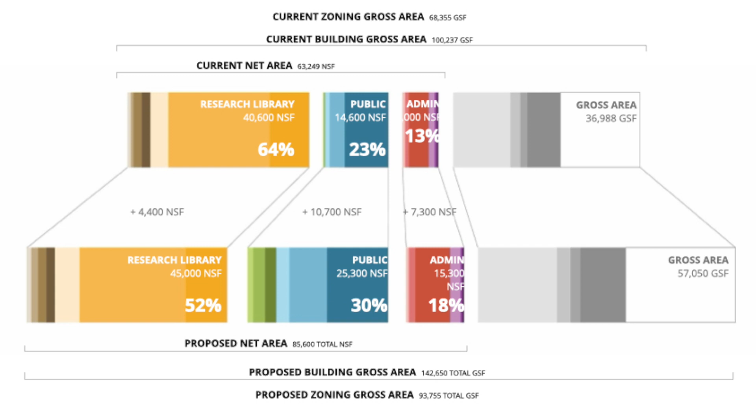The areas that are showing the greatest expansion are the areas for public engagement in blue and green, and the area for staff support in red. That's where we got a lot of our net space, including circulation, access, amenities, and there's additional investments which are not shown in this graph in sustainable vault spaces for our collection.

Just a couple of pictures by way of biography. That is William Shakespeare on the left, a postcard of the Folger from the 30s, and then Henry and Emily Folger on the right. These are some of the players in what became a history of design in our building. Of course, Mr. and Mrs. Folger were very active in shaping the spaces.

Just a couple remarks about the building. The building is covered in writing, and the writing is the words of William Shakespeare and others that are quoted in the famous First Folio of Shakespeare's plays—that's the 1623 printing of 36 of Shakespeare's plays. But the building was supposed to look kind of like a book.

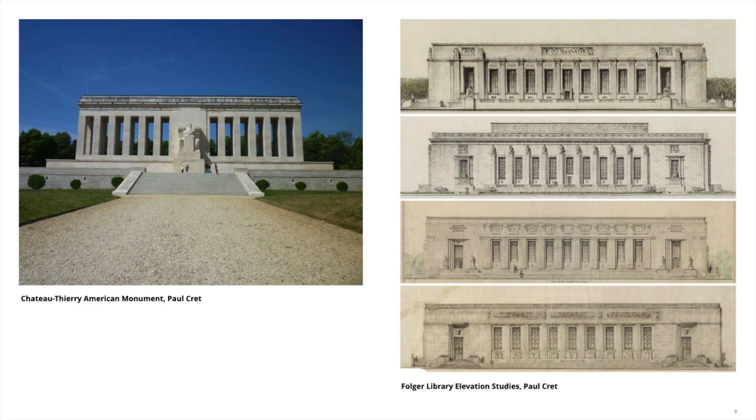And as we look at how the design developed—one of the reasons why Cret was selected by the Folgers was because he had experience in creating memorials, and he had done an important war memorial to World War I soldiers in France.

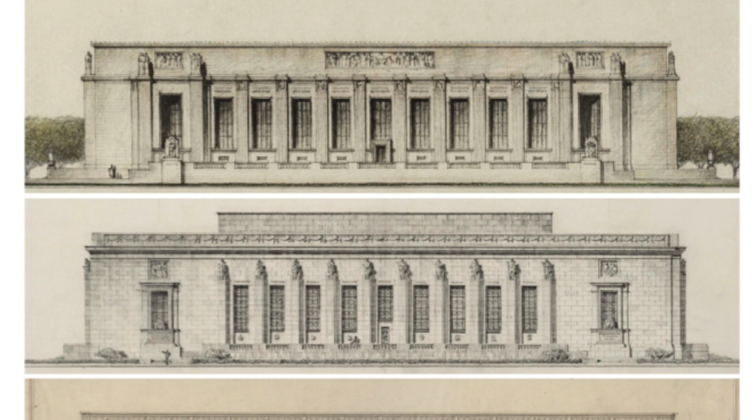If you look closely at the early designs of our building, one interesting thing is that the name on the building is Folger Shakespeare Memorial Library. In fact, that's still the name printed on our checks, the legal name of the entity. It was conceived as a living memorial to one of England's great writers, situated in the heart of government in the United States. But Steve and Anneliza and others will want to talk about what it means to try to build a memorial that is alive.

So, master planning goals: we wanted to honor the Folgers' gift to the nation, welcome and inspire a new generation, make access to the Folgers spaces and collections seamless, provide secure spaces for the Folgers' growing collection, invite visitors to explore the collections, provide ambitious collaborative and individual workspaces, provide scholarly research for the 21st century, theater, and staff. You'd think I had these memorized, but some of those keywords have evolved over time. I think the presiding keywords, the spirits that circulate around the project, have been access and inspiration, and that's very much built into the plan we finally resolved on.

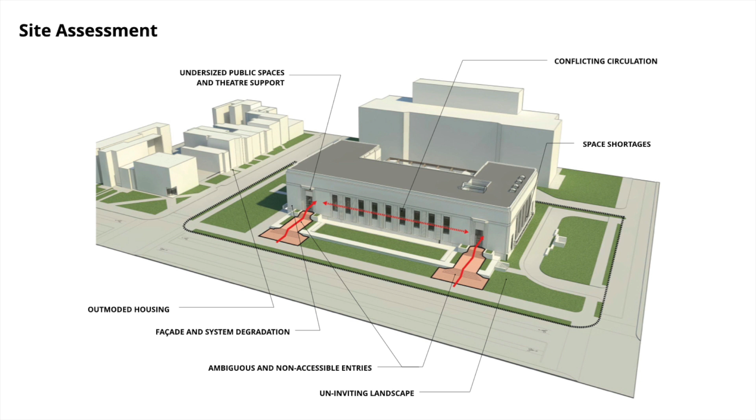The site assessment showed a couple of difficulties: physically an inaccessible building. The major east-west axis, the Great Hall, was often shut — for at least a month or more a year, making the building impassable. That space, designed by Paul Cret to have full daylight through sweeping windows, was actually our only rare book and manuscript exhibition space. It's a terrible idea to expose light-sensitive books and manuscripts to bright daylight. When I arrived at the Folger in 2011, those windows were covered in linoleum — not a good long-term solution.

What we really needed was a solution that simultaneously opened the Folger and made it unambiguously welcoming, but also connected our spaces and provided us the ability to show our collection in appropriate spaces.

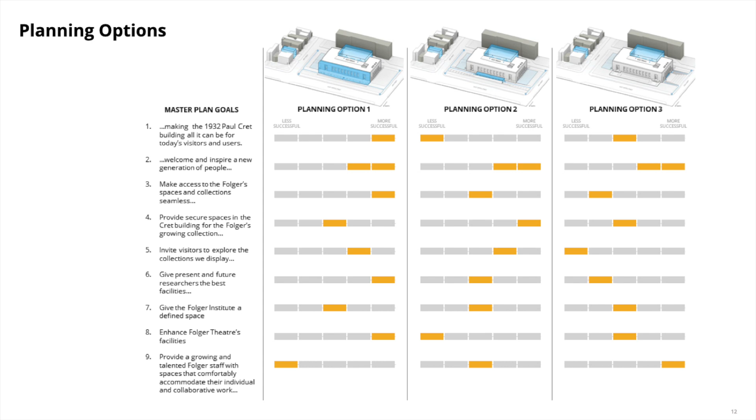As with all planning projects, we had options, ranging from encasing the front of the site with glass, which was breathtaking, but in the end felt unachievable given the place where we are.

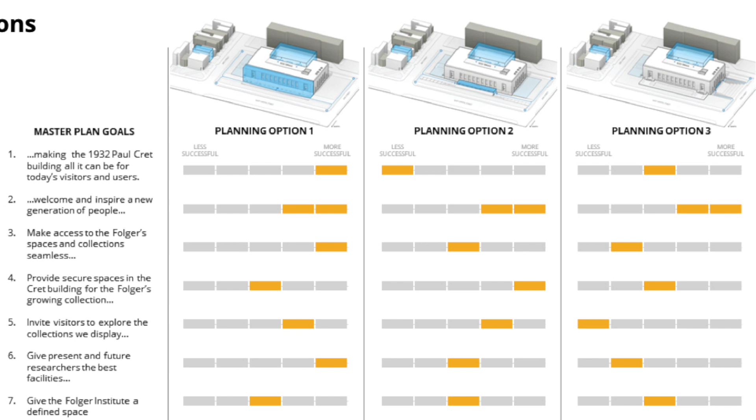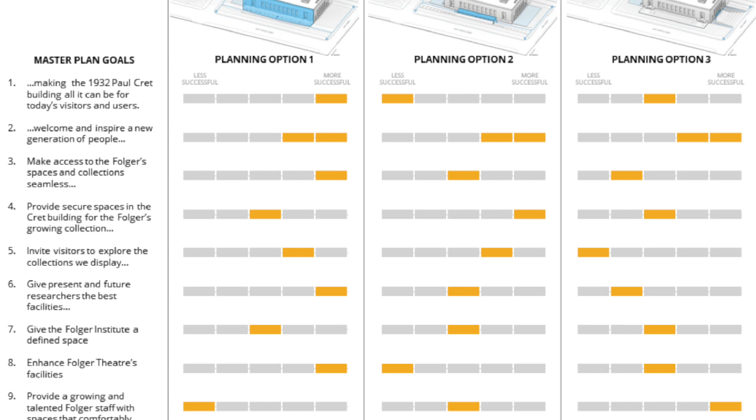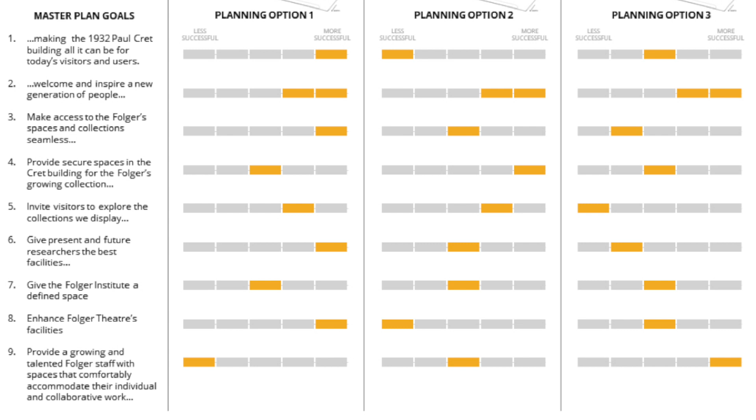The most exciting part of the master planning and project selection process for me was when we worked with the architects, and OLIN was at the table talking about how we could use the landscape to effectively say hello to people. As you transition from the official federal civic spaces of Washington, could you cross a threshold into the Folger and, in a once-upon-a-time fashion, start to go into a more green space, a space of imagination that relaxes you? And could you then — this was Steve's insight, which kind of floored us all — take the landscape and pass it through the building so there's one continuous journey going from the corner of our site all the way through into the heart of our exhibitions? It was an elegant and simple idea, and it won the day.

So that's how we arrived at the project we have now. You'll see it in detail later, but it involves a simultaneous east and west entrance through the landscape into a new set of public galleries and a pavilion space, which will welcome our visitors but will also allow us to exhibit hundreds of rare books and manuscripts that have never been seen before.

So I'm going to turn it over to Steve now, who will describe how we get there.

Thank you, Michael, and a real delight to be with you this evening to share some observations of the process we've been through for several years on this remarkable project. What Michael presented to you was a series of nested plans. A strategic plan is the broadest — that is the goals of the institution for its future. Nested within that is a physical master plan, as a portion of those strategic goals. And a third piece nested within it were some design principles that came out of that master plan that we were asked to accommodate in the new design.

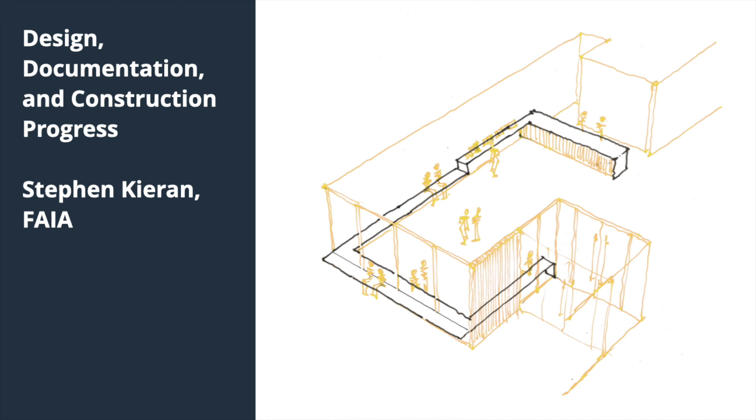These were based on where we stood at the end of the master planning process, and one of them was certainly more gallery, less circulation. The idea was really to delineate and differentiate the galleries from the circulation space, which was not where we left the master plan — that at the core of this exhibit would be a visible vault containing the Folger's collection of 82, I think that's right, first folios.

The largest collection of those in the world is in the Folger's possession. They're all in their own way unique because of who owned them over the years, mostly. They're going to now, for the first time in the history of the institution, be out on display for the public, at the heart of the exhibit.

We're going below grade. Ceiling height was something we really wanted to go after, and they certainly wanted flexibility for the future, and for obvious reasons, little to no daylight because of the value of the manuscripts.

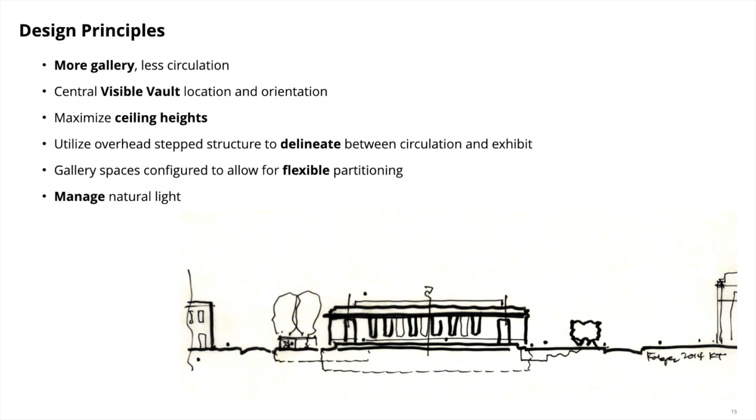So a little bit of a word on a less directed way of beginning. Shakespeare himself actually really provides the insight for this. He is well known for hardly ever inventing a plot—he took his plots from other prior sources, sometimes histories, sometimes other dramatic works. But he viewed himself as a renovator of his predecessors. And he renovated so well that people forgot where these things began, and we continue to believe they all began with him, but most of the stories have prior origins.

So in a way, that's what we're doing here. Our prior origin is the founding of the institution, completed in 1932 by Paul Cret, a very, very hugely admired predecessor where I come from in Philadelphia, teacher of Louis Kahn and many other remarkable architects, and a great architect in his own right. Hugely admired predecessor for us.

But in a way, what we're doing with this work is what Shakespeare does to those plays. We're trying to make it anew for a new time and a new age, so that it can go forward and so those memories can live into the future. It is a living memorial with all the complexity that comes with those ideas of memory, which we all tend to view as stable. It's not. And life—this institution is all about that.

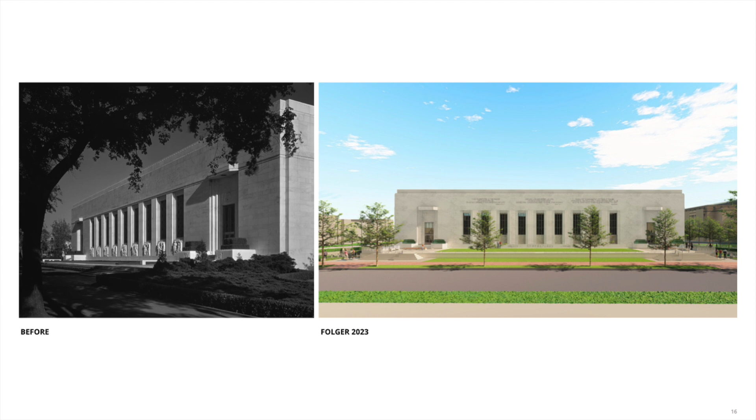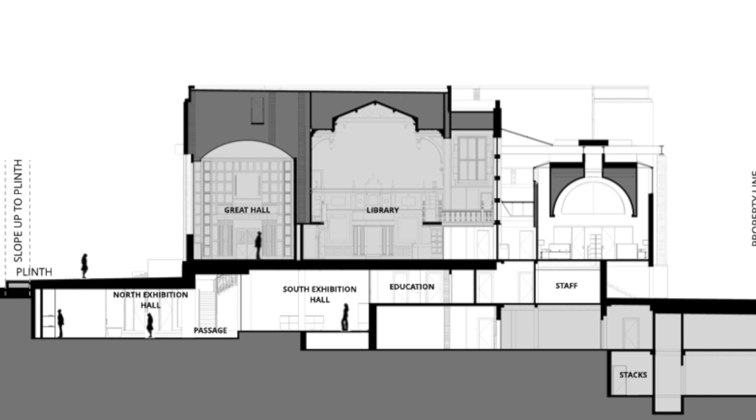So the fundamental idea of renewal here is to add a building underneath the building. If you look carefully at the sectional diagram here, you'll see a section of the Great Hall, the remarkable space Michael showed, along with the library. Beneath that, we're basically hollowing out a new building that extends out onto East Capitol Street underneath the plinth of the original building. That is the fundamental design intervention, and it is in conversation with all of the historic spaces and in support of them, and makes them better and gives them a more vibrant future. That's fundamentally what we're trying to do through the changes made here.

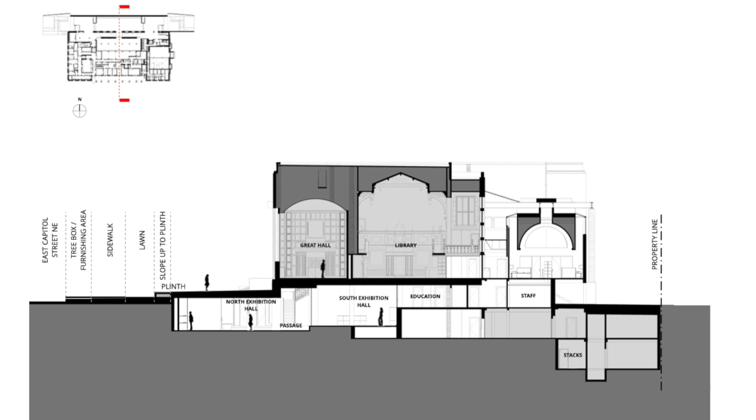The big move that Michael described is really simple, as all wonderful design solutions ultimately are. It is basically to carry the landscape from the corners, the east and west corners of East Capitol Street, on the Library of Congress side and on the more residential side to the east, into, under, around, and through the whole of the new addition, welcoming the public through this landscape and buildingscape into the world of William Shakespeare.

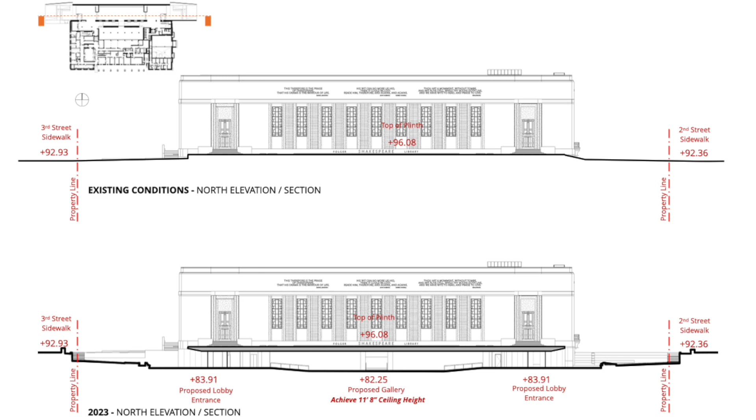The Folger is now a collection of remarkable rooms: the Great Hall, the theater, the library itself, and the Founder's Room—all remarkable individual rooms in their own right. So it's a building of rooms and of interiors. And we, with OLIN, thought of our work as a suite of new rooms.

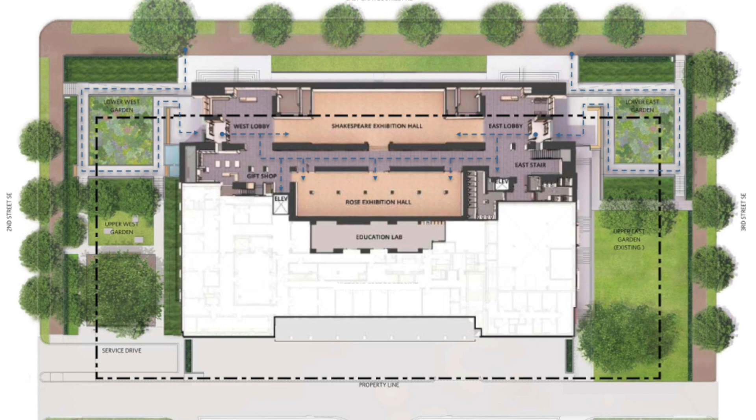The rooms begin out in the landscape to either side. They welcome you in from the corners and bring you gently down, spiraling into the earth, into a suite of interior rooms that include two major new exhibition halls: the Rose Gallery and the Shakespeare Exhibition Gallery. The Shakespeare Exhibition Gallery is the one that will contain all of the first folios, as well as other engaging, interpretive, interactive exhibits that bring Shakespeare forward for a new time and renovate him and the building, in essence, for new audiences. So that's our fundamental mission that we're after on this.

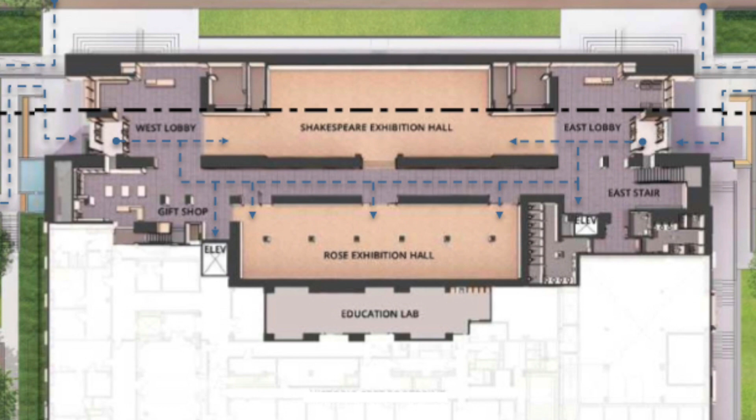And we believe that the conversation with Cret is a rich one. He made rooms, we're making rooms. They're interconnected—they add to, not change, each other. They expand the story, not contract the story. That's what great renovation is, whether it's of a prior idea that becomes a play or an existing building. It's about a conversation across time with admired predecessors, expanding their work for new times and new audiences.

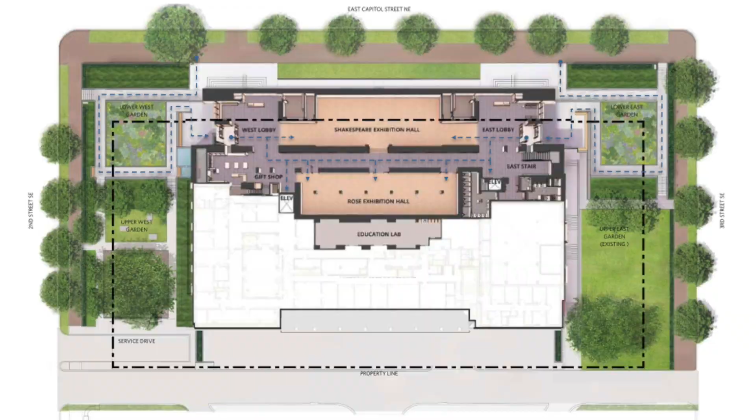All right, thank you. So from the landscape, we really approach this as an essential and integral part of the overall site and museum design. And we pulled inspiration from Shakespearean writings that reference the landscape quite frequently, also describing the environment in vivid detail to really bring the reader into the environment and feel part of the space.

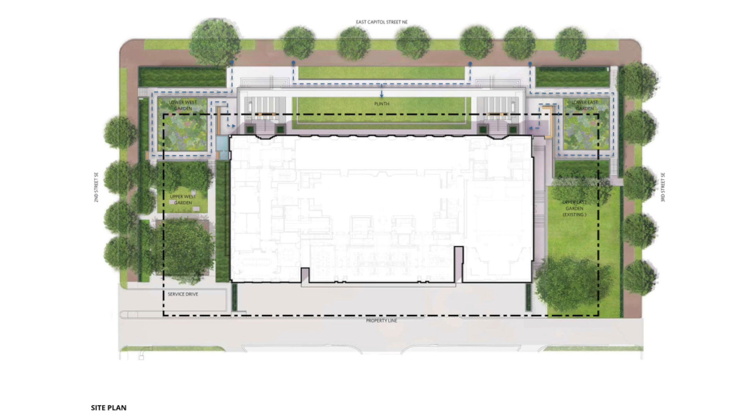So this is in plan showing the sequence of rooms that Stephen referenced. You can really see how there's the west side of the site with a west garden and the east garden connected through with the exhibition space below. The idea of these meandering paths through the garden really bring you gently down into the space as this welcoming first room that visitors experience as they enter.

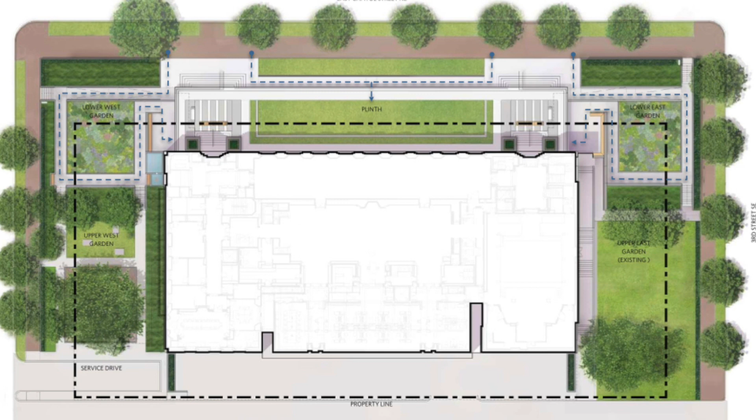All of these walks that meander through the garden are bringing you down in an accessible way. The first shown here is the only one that requires handrails, and everything else is a very gently sloping walk down with moments to rest, sit, and relax, and also look onto this garden with seasonal interest through color and texture.

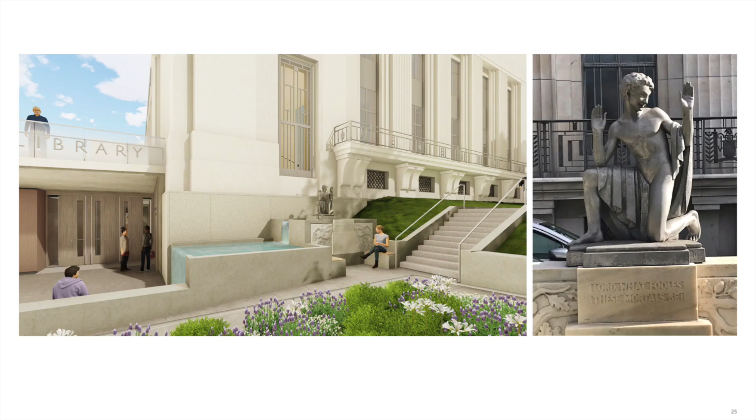And then bringing you down to a relocated fountain here that has a Puck statue, and into this kind of open waiting area or entrance room before you enter the gallery space beneath.

In the garden inspiration, a lot of the plants are native plants with seasonal interest, but we did pull some cues from Shakespeare's writing with plants that are specifically referenced. So these are kind of Easter eggs that someone might find as they move through the garden space, and really a nod to the programming of the interior gallery.

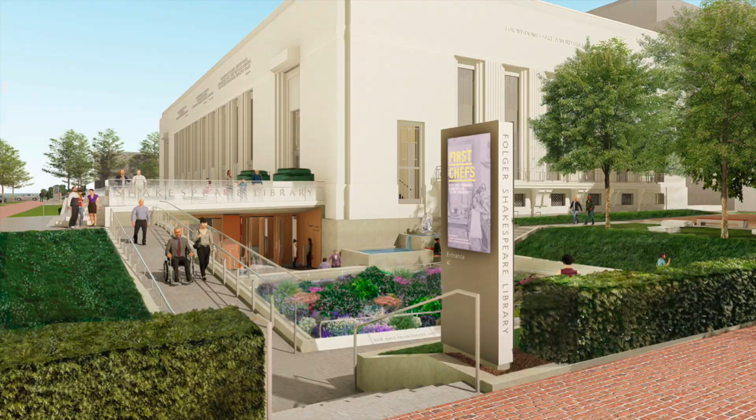This is the first moment that you would see standing at 2nd Street and looking down into the space. So the gallery or garden space itself, you've got this meandering garden experience. We pulled a lot of cues from Elizabethan gardens, so this kind of panel of very vibrant, varied texture and color.

And then also this element of water down at the base near the entrance. The sound of the water would really be this amazing amenity for visitors, and it's kind of pulling you down, saying, welcome, come on down and enter this gallery.

We're also incorporating a poem along the curb, so really looking at this as part of the interior space, and really the programming that's part of the exterior is seamlessly tied with what's happening inside.

This is a closer view at that relocated fountain. The image on the right is the original Puck statue and some of the marble inscriptions and carvings, and that's actually being relocated and integrated here with the upper pool, and then the water cascades down. That sound from the moving water cascading, I think, is going to be a really welcoming experience, adding this whimsical character to the space.

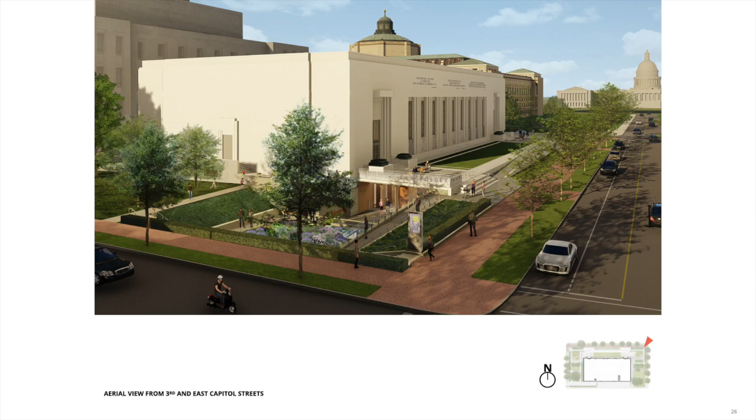This is a view from the corner of 3rd Street and East Capitol, looking down toward the Capitol building. We're looking at the East Garden here, which is the entrance to the theater side. Programmatically, this can be divided off for theater events, but it's meant to really feel as a fully connected experience here along Capitol Street.

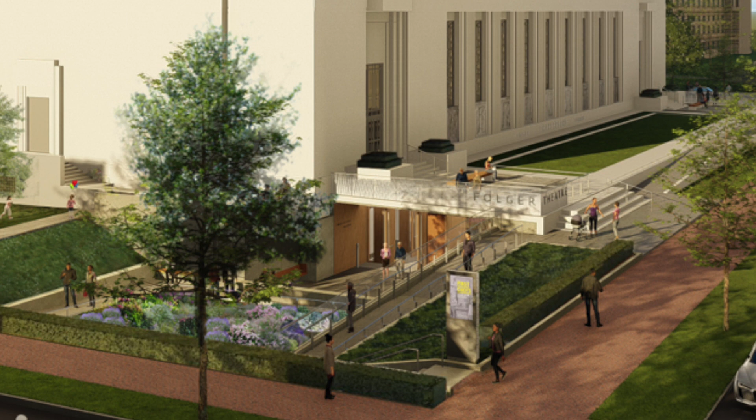It's the same strategy with a path meandering around the garden and going down into the entrance. Back on the west side, we're incorporating a small lawn area that people can sit and have lunch, and also sit under the shade of the magnolia, a very special tree that was on the site. You can look from here as just additional urban amenity space.

All of this has been opened up and really feels like a public open threshold for the community at large, and also the visitors to the museum.

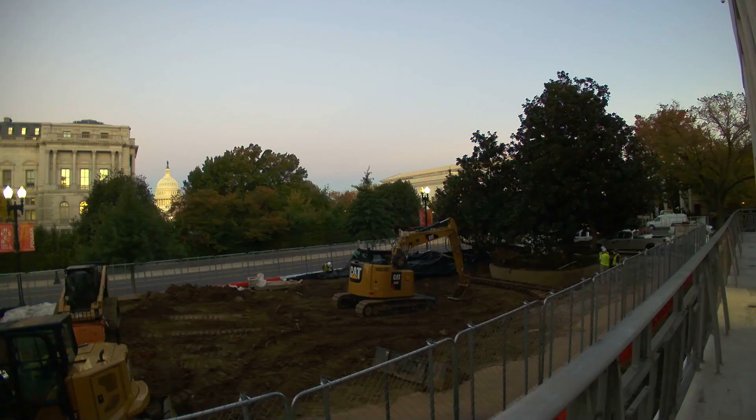And this is a video that shows magnolia on the move. This was quite a process to move this heritage tree because of the large-scale excavation that was happening to get down to the gallery space. We had to move this tree in order to preserve it, so the process was quite extensive and long.

They pruned around the tree to get it prepared, then drilled rods underneath a depth of soil that would capture most of the significant roots. They put tubes underneath that and inflated them at very high pressure, which allowed them to roll the tree 80 feet to the south to its new home.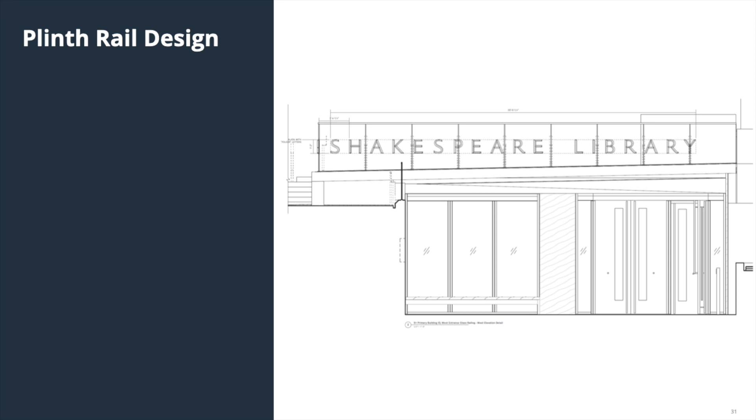I'm going to focus just for a minute here on how we went about developing this one detail. In addition to the function of protecting individuals from falling off of it, we wanted you to be able to see through it, so you could see through to the Cret building and not block it from below.

We also wanted to put the name of the Folger rather boldly on it. The only other place the name occurs literally on the building is in the middle of the front facade. So we wanted to extend it around so there's clarity about welcome in contemporary terms. It begins at the front door and starts this guard and says Folger there, starts to gently guide you down into the new entry, into the new entry gardens when you arrive on East Capitol Street.

We thought about it first in conversation with Cret in this way. All of his letters are chiseled into the building, incised into it. These are the opposite of that. They're not incised into it. They're added onto the glass, but they're angled and chiseled, just like the original letters. So that's a sort of conversation at a detail level, doing the same thing, but in opposite ways.

He did it in stone. We're doing it on glass. We're adding to the glass. He's subtracting from the stone. But there was a lot to think about on this.

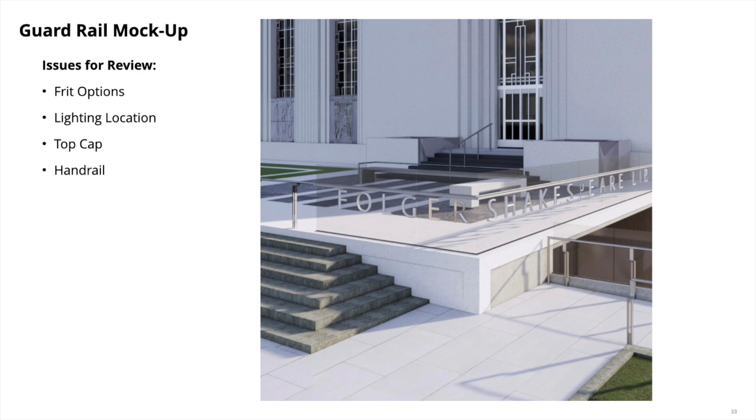This is a good day when you get to work on something like this. Jordan, who's in the audience, built these mock-ups. We weren't sure what this would really look like, so in our fabrication shop at our studio, we built a glass mock-up of the whole thing. We 3D printed the letters, I believe, and adhered them to the glass. Then we started to look at different kinds of frit patterns we might add to it, thinking the frit could help the letters and the sign read through more strongly than they would if it was all on glass with all the background showing through.

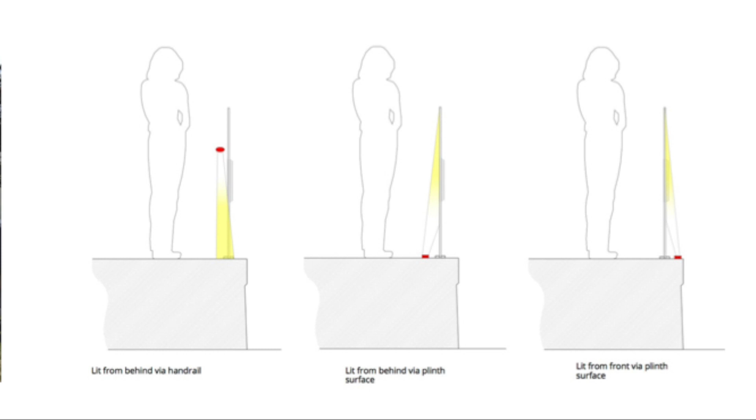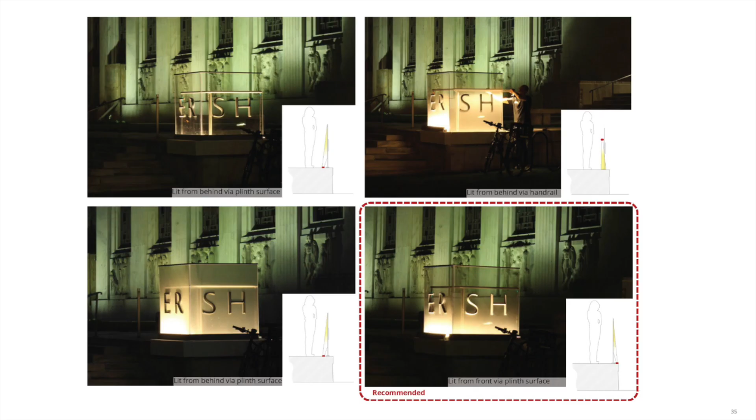Then we did it at night. We looked at the lighting in different locations. In the top left, it's behind the glass. In the top right, it's underneath the handrail. Bottom left, again behind the glass, but with different frit patterns on it. That's a kind of a fade pattern on it.

And in the bottom right, the one we selected, we moved the light to the outside edge. We thought it really showed off the kind of chiseling of the contemporary letters best, that it created a little bit of a warm glow, an invitation at night.

So that's just insight into hundreds and hundreds of details that we have sweated over on this building to tell this story from top to bottom, from the big scale planning moves to every detail in it. And that's what goes into working in and around a building by an incredible architect and an admired predecessor. You have to bring your A game to it. Cret certainly did. Shakespeare is so far beyond A for any of us in the world that just working around him is an inspiration.

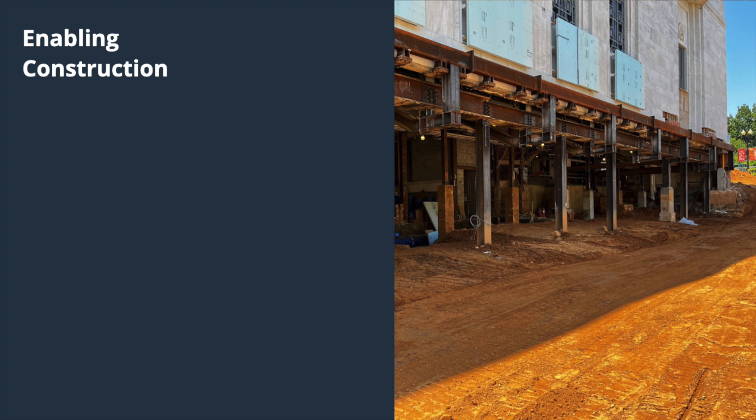So lastly, a few notes on enabling construction. This is a part of design that gets no visibility to the general public. We design a building as we hope it to be when it opens. The builder has to figure out how to design a construction system to make that happen. And that's called enabling design. It's done largely by builders and engineers.

They had to support the entire facade of this building, which was supported on the ground, through steel that they added to the frame of the building, and add reinforcement to that steel within the building because it wasn't designed to support the facade. That's what they had to do. They had to literally lift the building up across the entirety of the facade so they could dig this hole to connect the new gallery to the undercroft of the existing building.

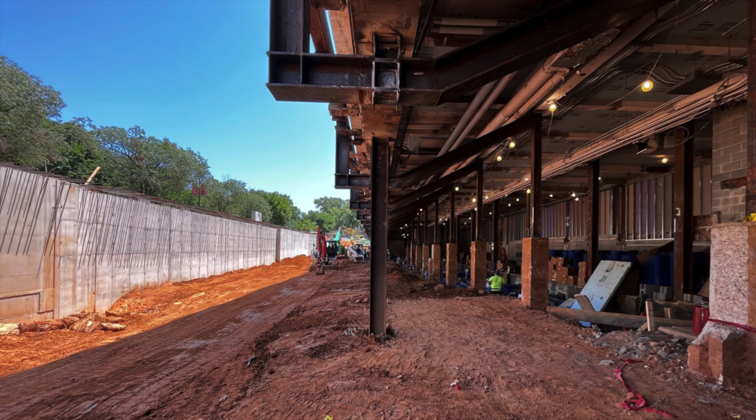We've certainly had challenges along the way, but you have to support everything above and then intermingle the new design with the old in this ongoing conversation. But to get there, you have to do all this work and then take it all apart so nobody ever sees it. It's incredible. A lot of the technology comes out of Europe to make this happen. They do this more regularly than we here in the U.S. do. So you can see a steel beam posted up on 2 cross beams there, supporting one of these

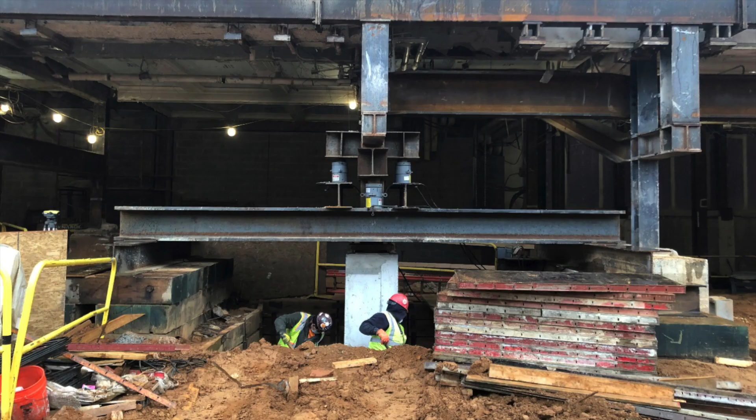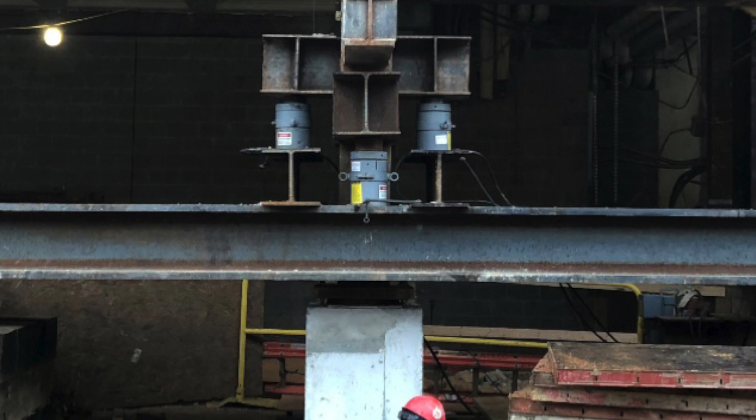new columns, which we had to weld steel to it so we could support it from the sides. And if you look carefully at it, that's Jeff, our wonderful job foreman in the foreground there. But these are all little pneumatic jacks. They're connected to computers that... It's not like changing a spare tire. No, it's definitely not like changing a spare tire. They're connected to computers that monitor movement in the building and settling, and they can be adjusted to millimeters.

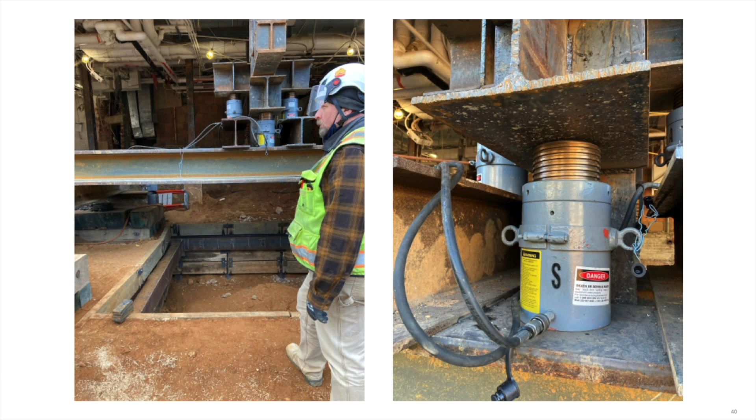That's what you have to do, working around an artifact of this import in a location of this import for a writer and donors of this extraordinary building. This is the extent you go to.

So lastly, some building system challenges. Folger had very few systems in it in 1932 when it opened. It had heating, it had some power, it had some lighting, certainly had some plumbing for the toilets, not much more. A contemporary gallery for one of the rarest collections of books on this earth, and most valuable collections of books anywhere on this earth, has to be completely controlled.

Everything about the environment has to be predictable, controlled, maintained. The only place we could fit it in is under the floor of the new addition. So those are all ducts going in, and also under the floor, and there's going to be a concrete slab poured on top of it.

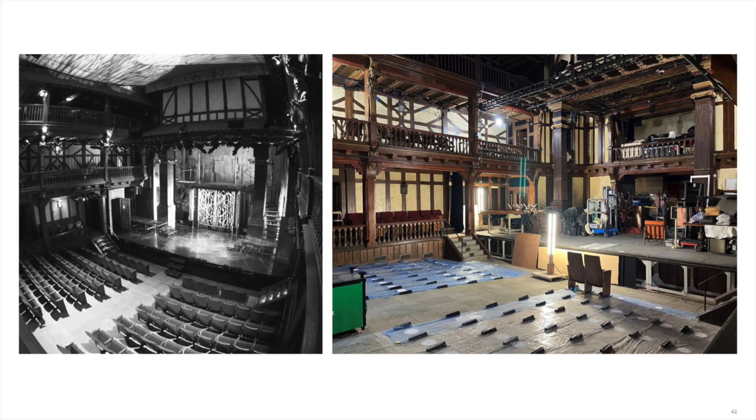The theater isn't air conditioned like the space we're in now. Folger decided to air condition rather late in the project. It was a really smart move, because if it didn't happen now, it could never happen. The seats were all taken out, and there's a mechanical room underneath this theater.

We do a lot of performing arts work. This is the last place in the world you would ever put a mechanical room in a contemporary building—underneath the theater. It's the hand we were dealt.

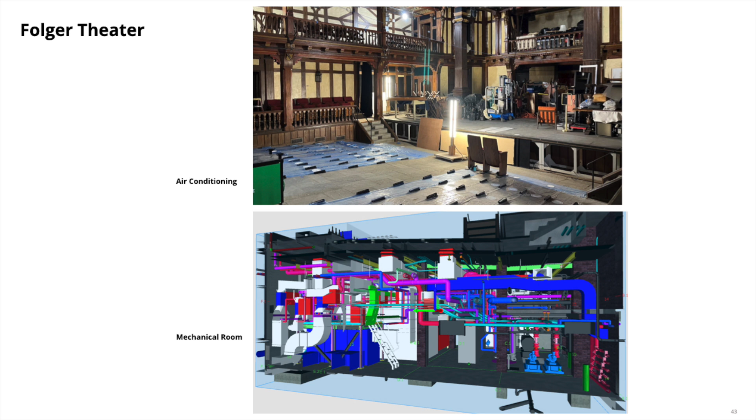We inserted not only completely new equipment for all the air handlers and the equipment in that mechanical room, but ductwork to air condition the theater with a real low velocity system underneath the floor of the theater. And the modeling we had to do to just fit that in there with the builder was a work of art in its own right.

Nobody ever sees it, nobody cares about it, but it's a huge part of the design. I think someone will name that engine room. I think it's a major work—it's a work of art, it truly is.

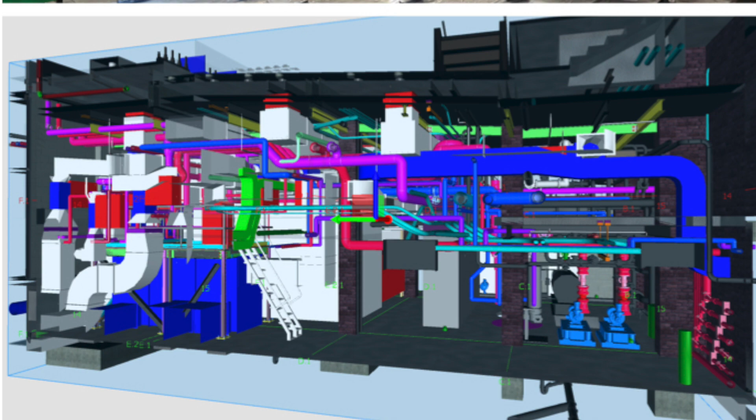But so to close, I'm going to take you on a little walk—video here into the building.

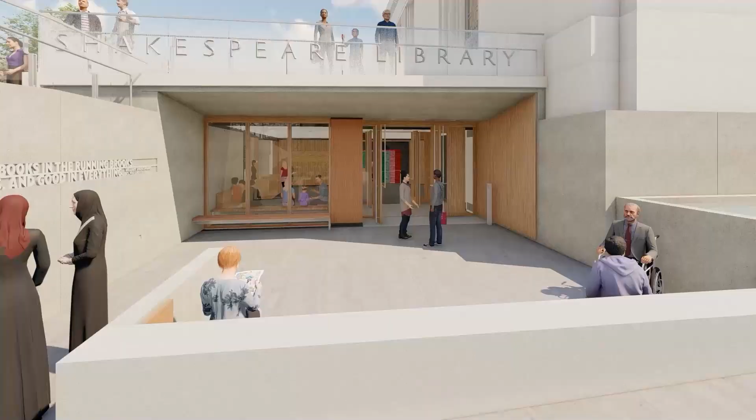I often think of our interiors kind of like the lining in a jacket, the way Cret thought of his interiors—these wooden interiors that we're pulling through to the outside here.

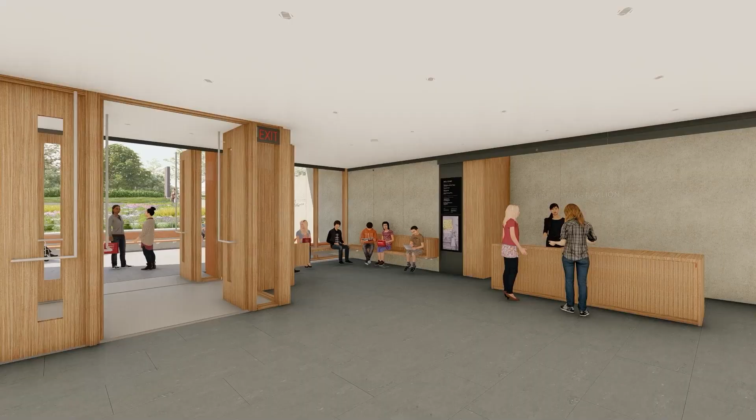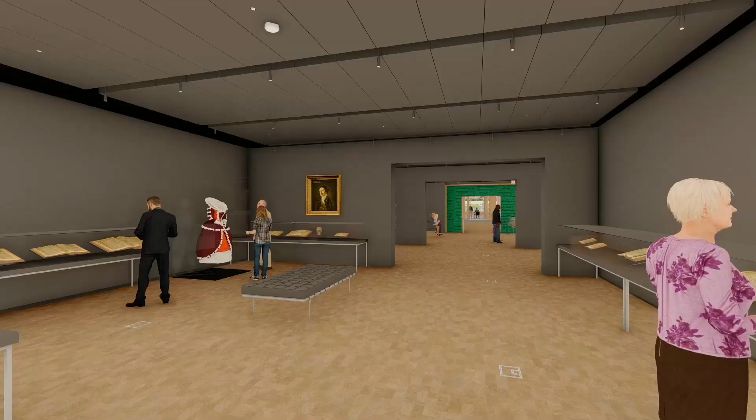But at the end of the day, the essence of this project is to honor the memory of the Folgers and their gift, the memory of the architect who made it, all in memoriam to William Shakespeare, in a way that makes it into a uniquely American building type, a living memorial.

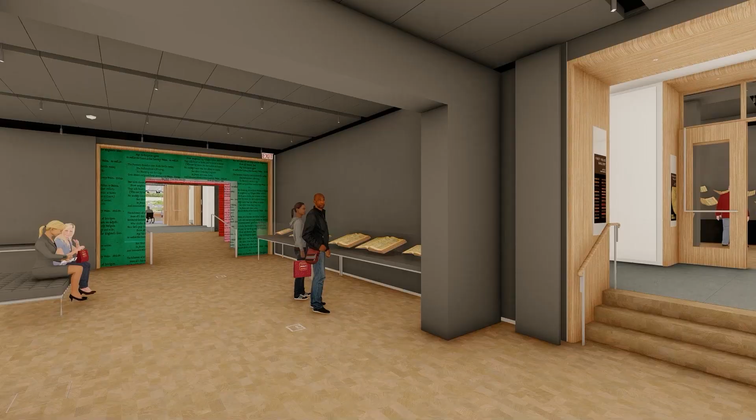It's a memorial that isn't fixed at a point in time, that can be reinterpreted for each new age, which is necessary for memory. If we don't renovate memory, it's no better than a building that doesn't get renovated.

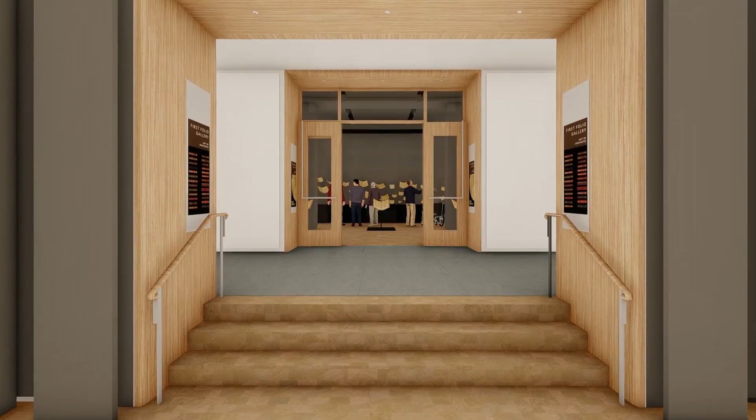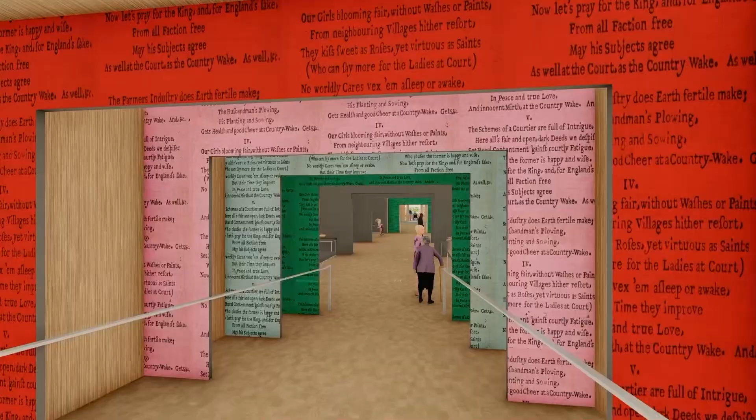So the two are carefully intertwined here in acts of renewal and renovation that bring life for new generations who don't yet know Shakespeare but need to know him. We all need to know him. He's clearly the most extraordinary writer to ever grace the English language.

And his insights as an early modern remain so relevant today that we're sitting here in the National Building Museum, still presenting, as we all do, year in and year out, one of his plays. Think of another playwright—is there any other playwright who's had this kind of longevity?

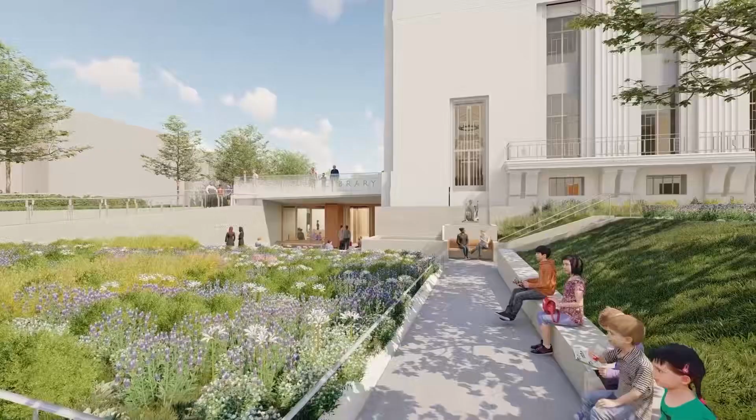A few—we still perform some Greek tragedies, but no one's near this. No one may ever be near this status again. So it's worth everything we can do to bring life to it.

So, thanks. Thank you. That was great.

Thanks, you guys. It's just so great to hear you talk about the project and all those words that have 'RE' in front of them—to renew, to renovate. And then I think about, we're in the Folger right now. We're also in the National Building Museum. They're both intertwined in this project.

And part of the impulse in this project, to perform in this space, is to restate and see again and renew our sense of what these stories can do, who can perform them, what audiences can take part in those performances and be inspired by them. Those are hugely important things.

And we need to use Shakespeare not so much as a monument, but a doorway that many, many more people can walk through. So that's the journey, and we want people to walk with us.

And we've walked out because we left our building to come here, and we want to greet all the people who are inspired by this space.

But I do think there are more doorways to walk through, and I'm really looking forward to the day when we all get to walk through the doors in this building with thanks and hopefulness, especially feeling thankful for all of those who invested in this project, our supporters in the Wonder of Will campaign, incredible architects and artists and performers and all of that vision.

The question was, there are still steps leading to the two original doorways, east and west, on the north facade of the building. Those are functional, we are not changing that, we really want to preserve all of that. But they will become emergency exits, for egress. We want to make the entry so unambiguous that you really want to go down that path and see there's a place for you. So that was a challenge, to visually signal that in the design, with the wraparound.

That particular aspect of the design was something we really worked over. We wanted to leave the steps open. The plinth is many things; in addition to a doorway, it is where the great bas reliefs are located, I think 9 of Shakespeare's tragedies and comedies. They're much admired, school children regularly are up there doing class photos in front of them. So we wanted to continue the access, but make it clear that the entrance has now moved.

So we've screened a portion of the stair with the glass guardrail coming around. The handrail comes around and signals, go here. The signage will reinforce it. But it's still going to be useful, not only for egress, but as a place to be in the city and to stand in front of those remarkable sculptures. So that was one of the most studied parts of the project, how people view the entrance.